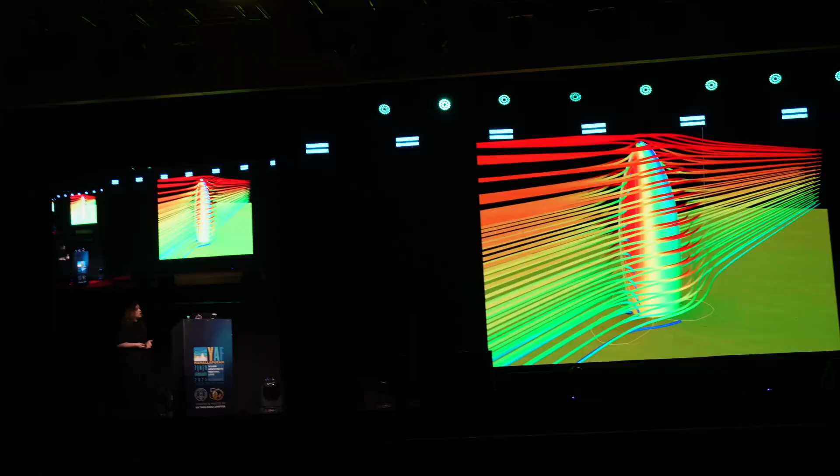I will give you a simple example of 30 St Mary's Axe, London's first ecological tall building and an instantly recognizable addition to the city skyline. The building is rooted in a radical approach, technically, architecturally, and socially. Being quite an old building at this point, many people know that it was developed through an array of different simulations that were revolutionary at the time and helped us shape the form of the building.

But very few people know that it was Excel that made us able to do it. Given the lack of affordable parametric tools at the time, and extremely limited interoperability between different CAD software, what we ended up doing was develop all our equations in Excel and write a small software in Visual Basic to generate the entire building in our modeling software. This meant that any change required by structural engineers or our designers could directly be replicated through numbers into the model.

But because we investigated the possibilities of this technology so many years ago, today we are able to use augmented and virtual reality not just as a visualization tool, but as a design collaboration tool and at a fraction of a price. That allows us to work with each other in many weird and different ways, and this connection with each other is important because human collaboration between creative minds is at the heart of how we operate in the office.

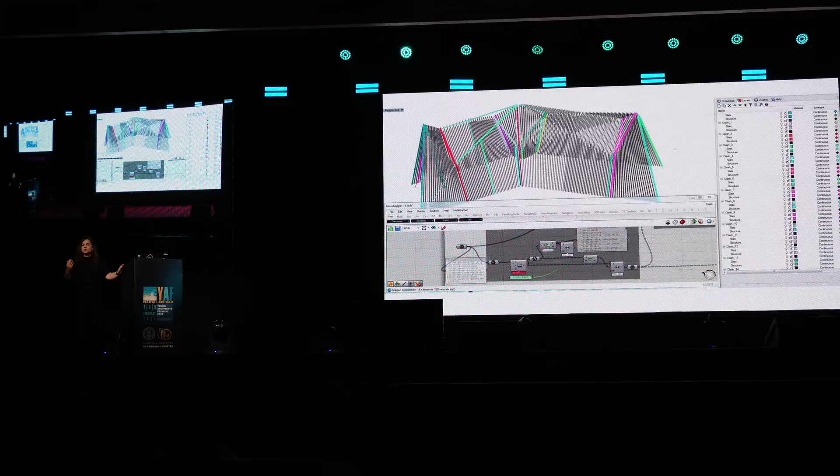So every change is replicated in real time, and details were very carefully considered to facilitate assembly on site. And you can imagine everything is based on that one model that we need to check all the time. So we ended up writing a small piece of software that did direct clash detection as we were designing, so even very small collisions of the millimeter could be directly spotted before anything went really bad.

The result of this precision modeling and documentation provided a rational structure for the beautiful randomness of nature, as the pavilion cladding has become a trellis for the vines planted around it.

My medium project could not be but something here in India, because we do a lot of work in India, and I couldn't have a presentation here without showing you some of the work that we do. That is the D.Y. Patil University Center of Excellence, and it is a really wonderful project. I spoke quite extensively with Chris Bubb, who's the head of this project.

And he always tells me that in this project, technology is not the master, but the servant. It's a combination of a passionate client and a very strong drive for performance-driven design. And it was really technology that ensured us that we analyze every single aspect of the design to make sure that the building worked appropriately.

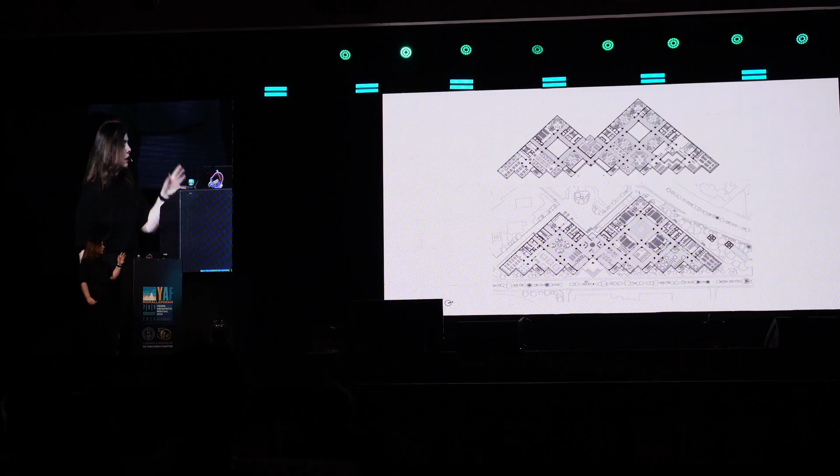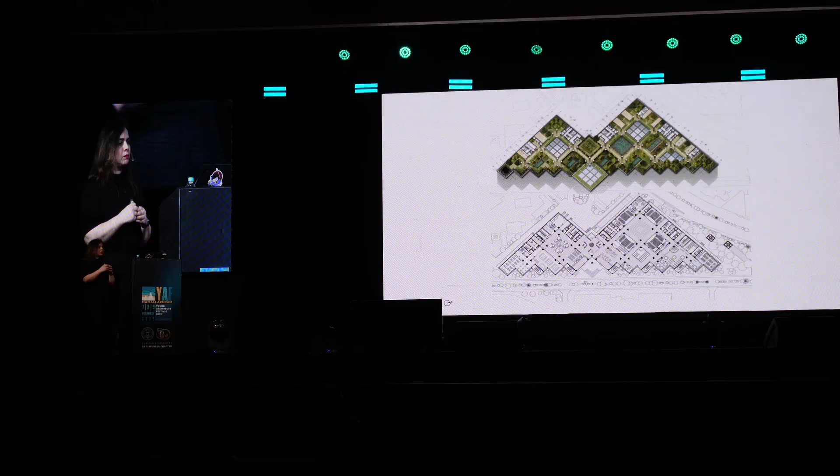On your screen you see a typical floor plan that was fully adaptable, and that plan kept changing all the time, with a very focused point being on the light wells. The light wells were the center of a lot of different activity because they are actually quite adaptable. Different light wells can be used for different uses and can adapt based on different needs, and that was a very big characteristic and is still a big characteristic of this building.

We keep talking about performance-driven design. What does it mean? It means that you're trying to create a building that performs in relation to your experience, trying to make your experience the best it could be.

This is a very good example for the gardens. The gardens were actually analyzed extensively against light, temperature, sound, and air to ensure the more comfortable experience when it comes to light, not too much humidity, allowing for subtle air to come in and create natural ventilation, etc. So a lot of these choices, although they just seem and feel right, they're not random. They're very carefully thought out beforehand.

As I said, sustainability is very important for us, for every building that we do. And in this case, the university has a LEED Platinum accreditation, which is as high as it gets. And that's because, despite this being a concrete building, something very clever was done. When we have concrete, it's cement usually that has the most embodied CO2 and creates most of the sustainability issues.

In this case, what was done was that 60% of the cement was replaced with GGBS, which stands for ground granulated blast furnace slag, a byproduct of making steel. And just by doing so, we have concrete that embodies far less CO2, while at the same time being cheaper and looking whiter.

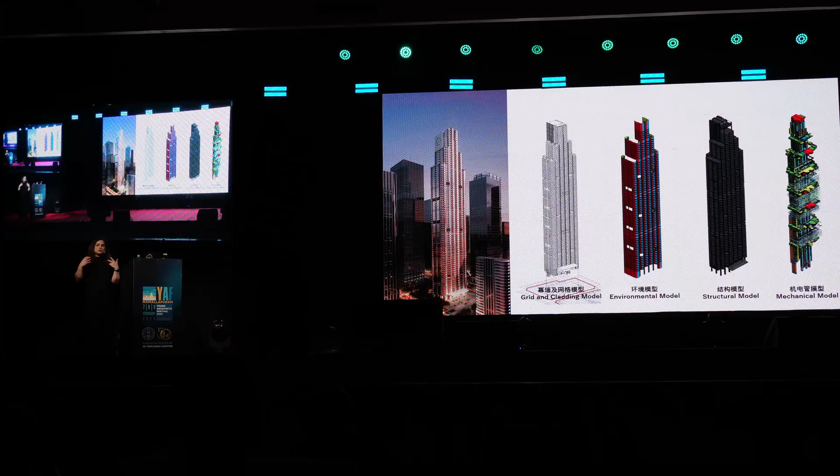So you can imagine if this is a linear process, one single change can take a long time. And this needs to happen in a very small amount of time with a very small team. So we saw it as a project that negotiates as much geometry challenges as coordination and workflow, and that's something we really wanted to focus on - how we can make this workflow more efficient.

To do that, the first thing we did was draw a data flow diagram that could allow us to understand who actually owns what data and how that data flows across the process. From there, we started building parametric workflows to automate different aspects of project delivery, and not just automate, but allow for changes in one model to happen simultaneously in all other models for every other stakeholder. We managed to do this using our proprietary interoperability software called Hermes, which we're going to show you in a bit.

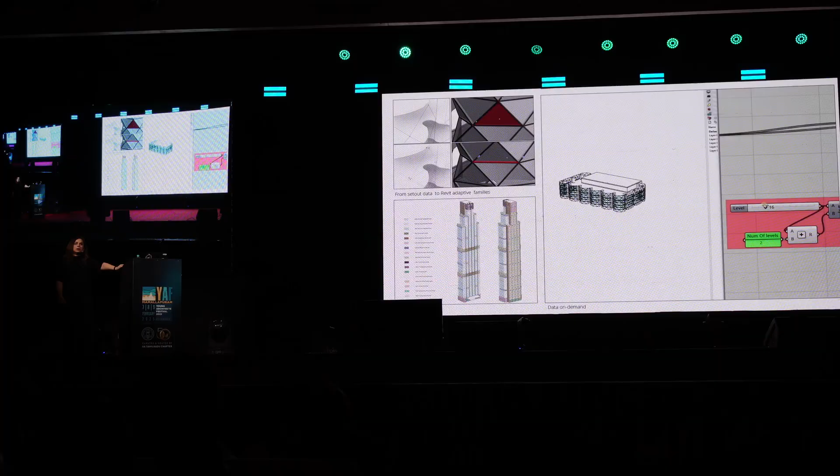Through these different models and workflows, we managed to do an array of different things. We allow, for example, Rhino files to directly deliver Revit adaptive families - so you go from a Rhino parametric model to an actual BIM model that is fully adaptable as well. We allowed for a lot of metadata diagrams to be created, and we allowed different stakeholders to only ever retrieve the type of information that they needed.

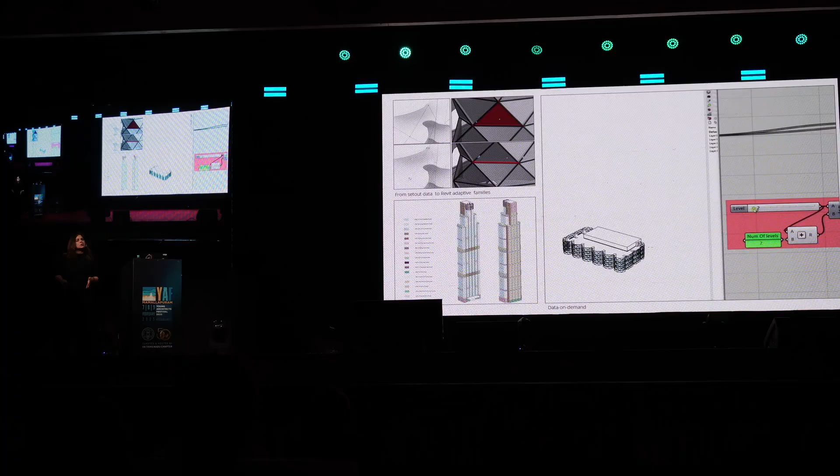In this case, you see on the right-hand side data on demand used by an environmental engineer, where they don't usually want to analyze the entire model. They want to analyze every 2 floors or every 3 floors. So through that, they could just select the levels they wanted, click a button, and get that model directly within their own software.

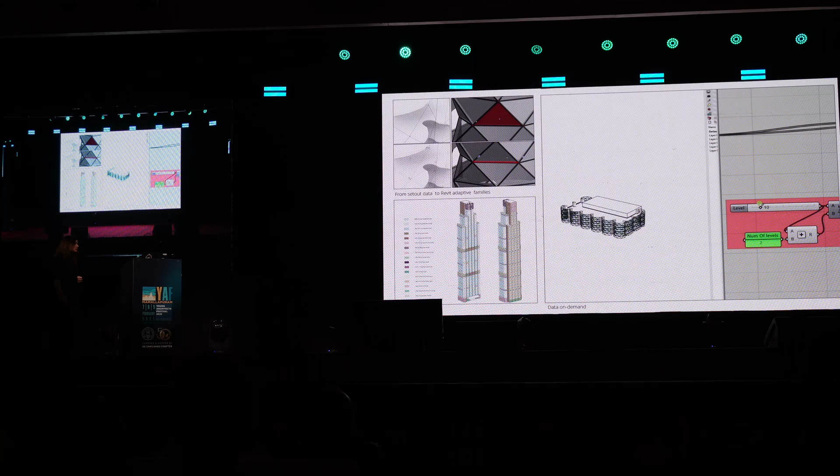In addition, things like that happen with the structural engineering teams as well. This video shows you how the team works. The structural engineers have 4 types of columns and they need to size them differently. Every time they run different analysis or the model slightly changes, that sizing changes, and that sizing is driven through the Excel spreadsheet.

That sizing then affects 16 different cladding variations around the columns. And those cladding variations don't only depend on the typology of the column, but also on the location of the column on site, as well as the relationship it has with the facade, which is also changing based on the location. What we're doing here is the structural engineer is changing the sizing of the columns in Excel.

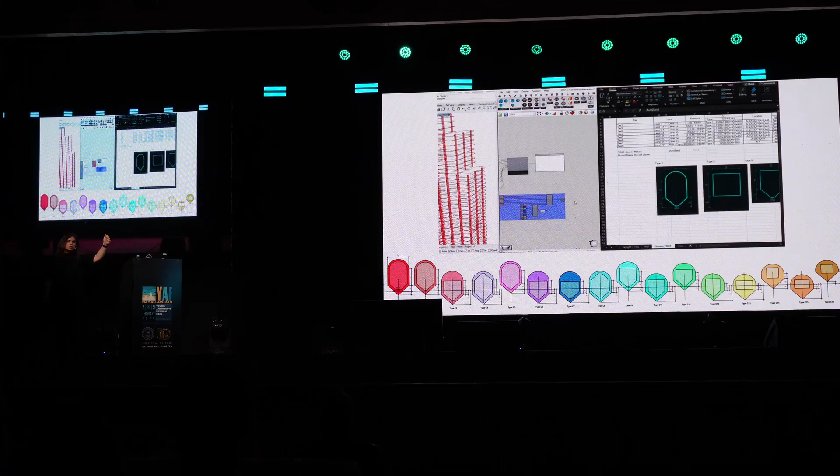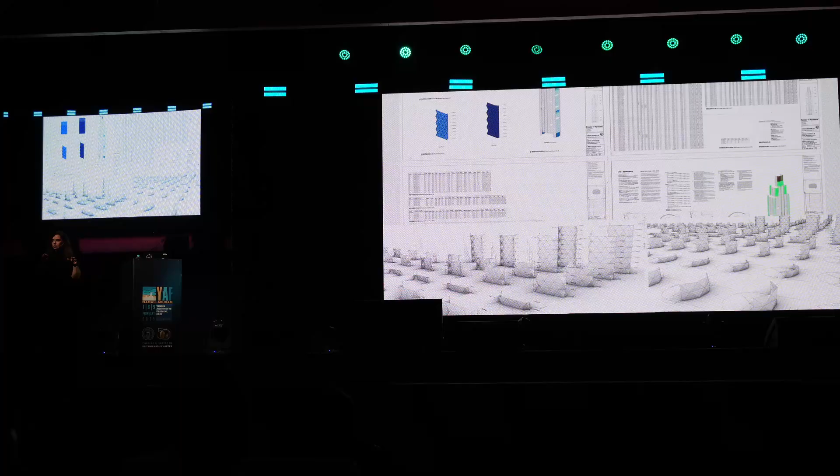That directly creates and is pushed into the parametric model by just clicking the Hermes button. The entire columns, everywhere that these columns exist, update. All the cladding gaskets update, and the entire geometry adjusts to that new column size. This happens literally in real time as you see it on the screen. And that's a direct connection between your structural engineers and your designers - it doesn't have to do with an export and import process.

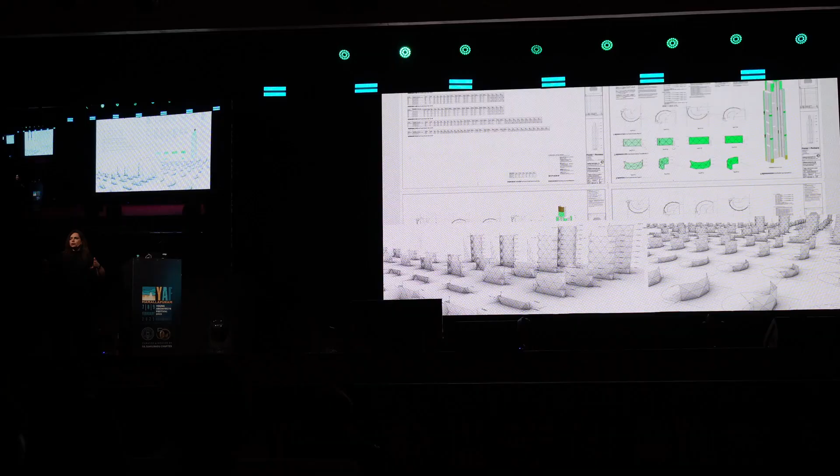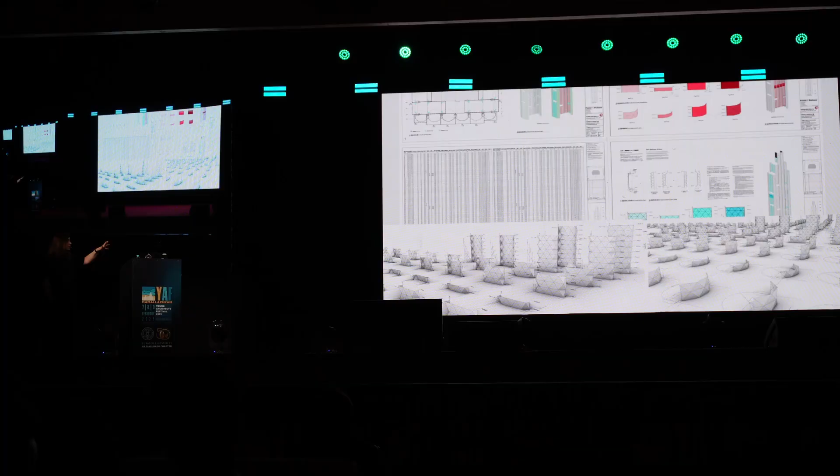Another challenge we had was that we had to create a blueprint for this. It was not enough to just send a model - we had to send a way of thinking, what we call a geometry method statement, that allows anybody with any knowledge whatsoever to take that method statement and recreate the model without necessarily having all the computational knowledge that we may have. We managed to do this by splitting the geometry into different parts that are the same, and the geometry statement you see there was automatically created, not manually created. The only manual part is actually the translation into Chinese.

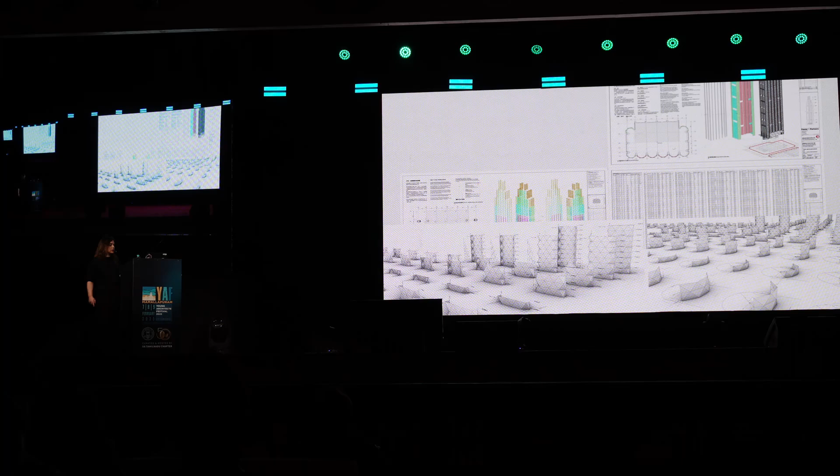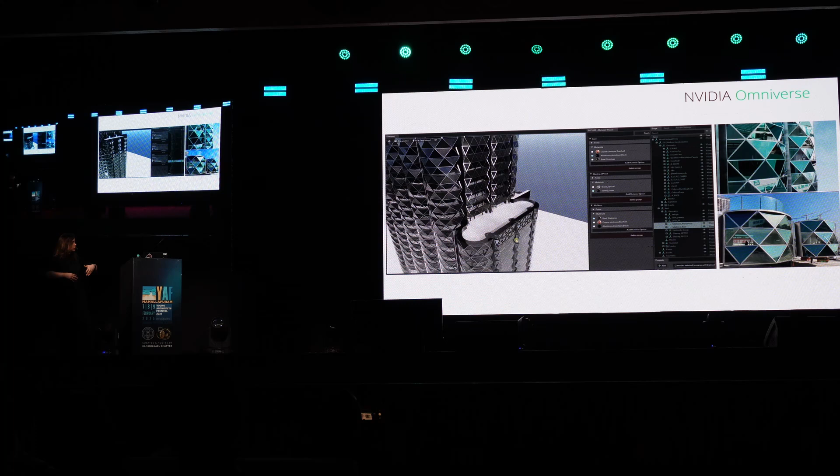Another thing that we played with in this tower was physically accurate materials. For those of you who don't know, physically accurate materials are materials that allow you to closely resemble how light interacts with real-world objects. So we used physical-based rendering for this exercise, through a software called Omniverse from NVIDIA. Omniverse allowed us to push different information from different people onto one single platform, and we wrote a few programs that let us change these materials in real time and change how the tower looked.

And we went for this idea of a digital mock-up. You have to create physical mock-ups that cost not just money but embodied CO2 - you have to travel a lot, there is a lot of money in creating them and traveling to see them. So we were trying to avoid doing too many tests with physical mock-ups. We said we're going to do it digitally, and the result was the top right-hand corner image.

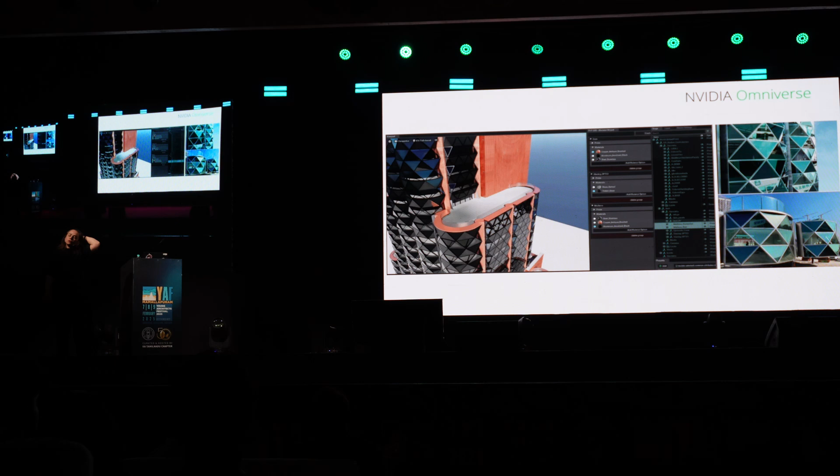When we showed that to the design team, they said there's no way the glass is going to look that black and the entire thing is going to look black. Lo and behold, the bottom part is an actual physical model. Do they look the same? I think they do look considerably the same. So through that software, we can do digital mock-ups very, very quickly.

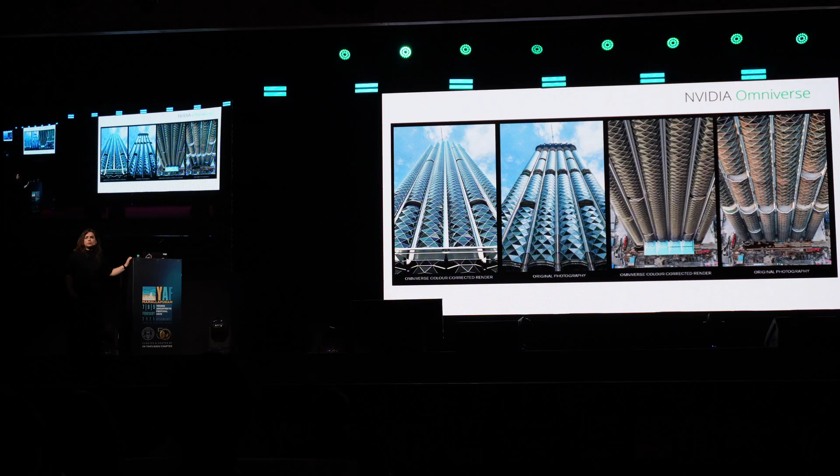Here you see on the left-hand side of each one of these pairs of pictures our color-corrected render delivered through the software, and on the right-hand side you see the original photography of the tower. I would say that they look pretty similar. Imagine how much more sustainable you can be if you don't need to create 20 mock-ups, but just the final two.

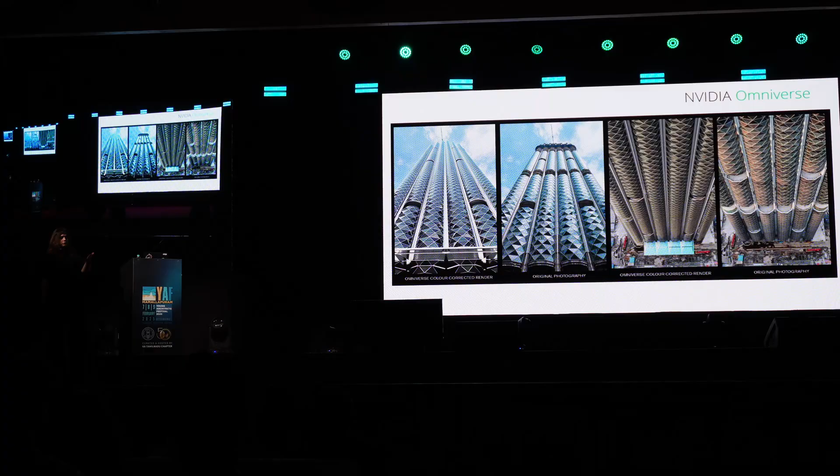And so there it is in all its glory in a rendering, but soon with you as it has topped out in April 2024.

Measuring 5.5 kilometers with 1 kilometer width, the governmental complex occupies the heart of the city, and that's where our main design work in terms of master planning is focused. It's defined by a strong urban grid that structures the city around it. A green spine runs throughout, and actually 60% of the area of that grid is not buildings, but is occupied by greenery and water.

The High Court complex is located on the central axis, and it has a stepped roof that was inspired by India's ancient stupas, and it has been influenced by traditional temple arrangements. Today I had the good luck to be taken to some of the ancient temples here, and they were wonderful. Raja, who so brilliantly toured me around, was explaining how you have this concentric circulation and rooms that follow the temple - and that's exactly what we have here. We have concentric rooms and circulations around the entire building.

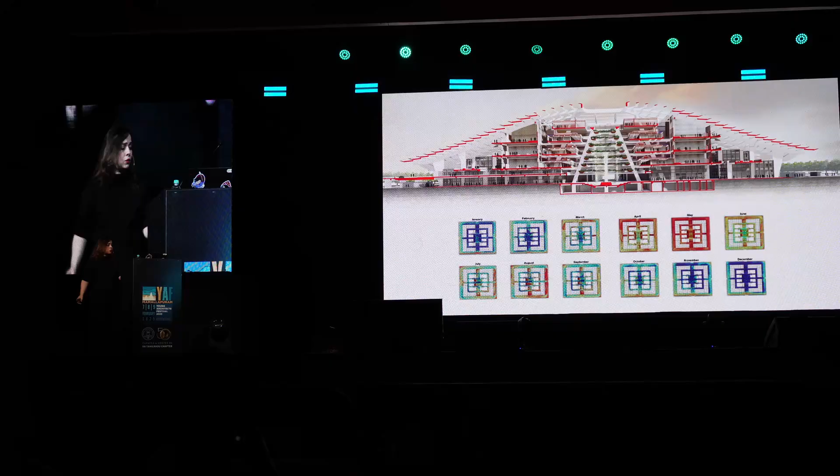We also have a courtyard and a roof garden that allows the greenery to penetrate into the interior spaces. The deep overhangs of the roof provide shade while also providing natural ventilation. That was very important because we wanted a canopy that would be fully comfortable almost throughout the year. We achieved that by trying to be very sustainable.

The entire city has been designed to the highest standards of sustainability with the latest technologies currently being developed in India, like photovoltaics. In this case, the roof opens up and allows air to come in, so it can be fully comfortable and airy and not too hot and humid. The PVs on top gather so much energy that they allow the building to run all year long just from the PVs alone.

We analyzed this exterior space and found that it has enough comfort in terms of temperature and natural ventilation for somebody to be there and stay for 11 months a year. The only month that is actually too hot, and even these measures cannot help you if you don't have technical ventilation, which we don't have in these spaces, is the month of March - or I think May or March, one of the two. But for that month, the courts are also closed, so it's going to be okay.

At the center of this green spine lies the Legislative Assembly building, which I think is quite a democratic and cultural symbol for the people of Andhra Pradesh, or has the potential of being. The assembly sits within a large freshwater lake and is framed by the Secretariat and other cultural buildings. Inside it has two major debating chambers and a lot of admin facilities.

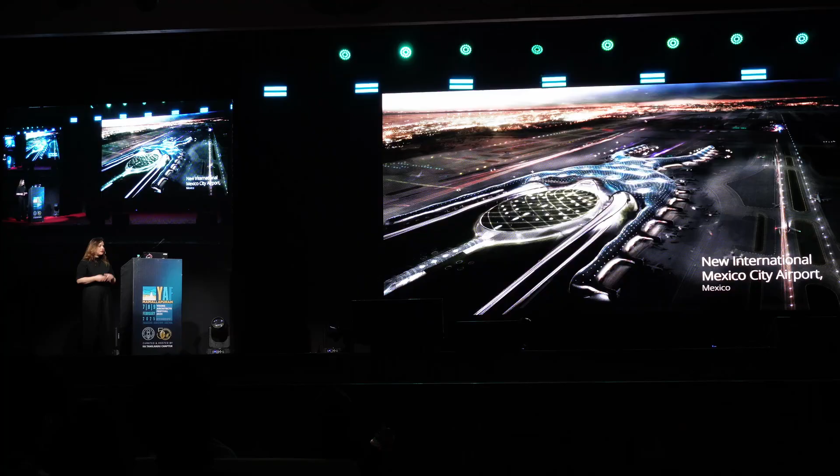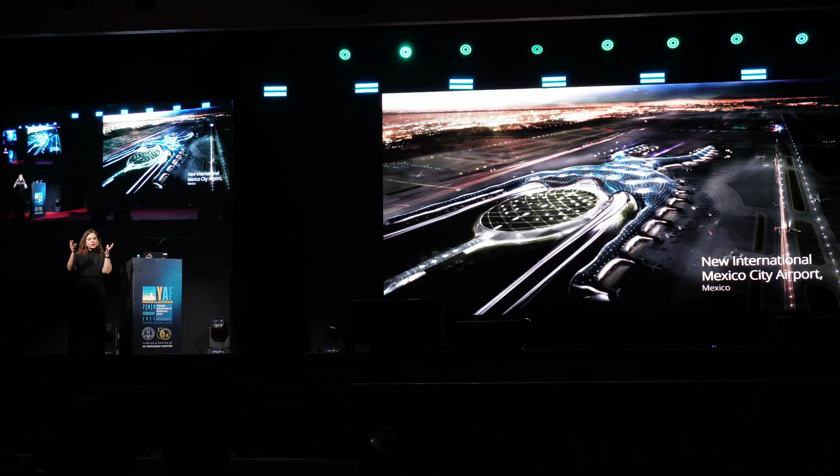Let's begin with structural considerations. The entire city of Mexico used to be on top of a lake, so the ground settlement conditions are really horrific. It's a highly seismic zone, and you've seen the earthquake that happened a few years back that was devastating. And to top everything, we had a volcano nearby that every time it exploded, it released volcanic ash that when wet, became concrete. So quite a few interesting challenges to deal with.

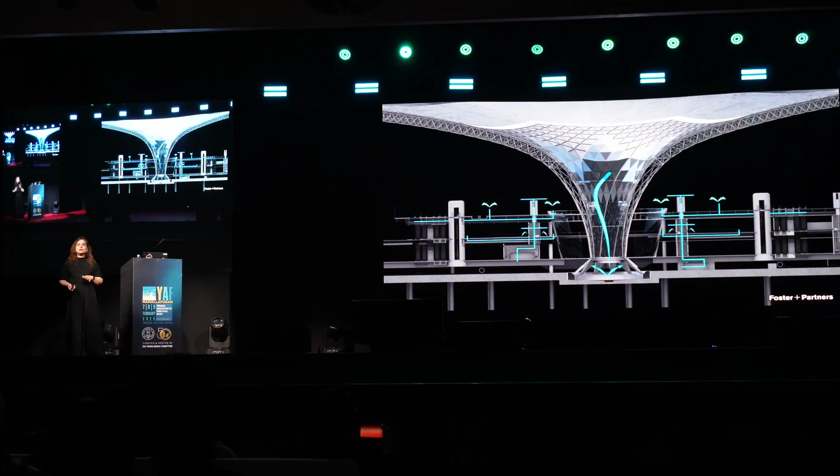Now, in terms of sustainability, we have a roof that works really hard. It has to integrate not only structural efficiency, but also thermal performance, ventilation, glare, daylight, and views. But most importantly, we're trying to rethink the paradigm of what an airport is. We want something that works as one single skin, lightweight and continuous as an envelope, and something that also did not distinguish between wall, ceiling, and column.

Now imagine that this roof is only as big as the 21 funnels that we have. In terms of scale, we're 90 times bigger. In terms of topological complexity, we're thousands of times more complex. So, how do you solve a problem like that?

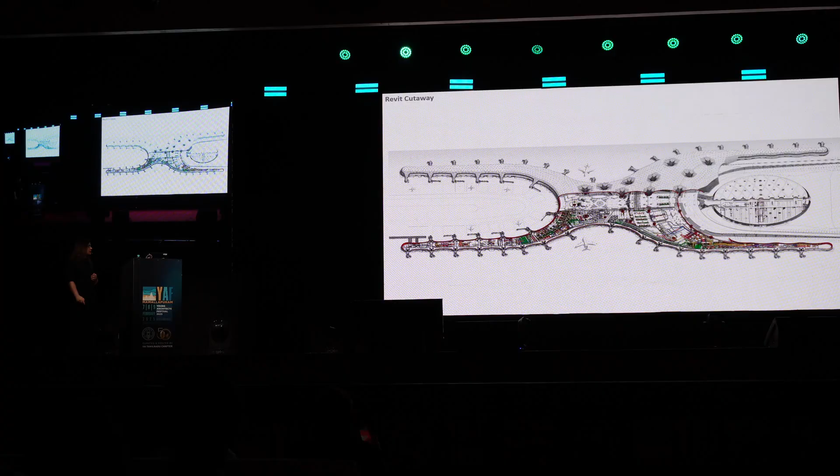And all this is just scratching the tip of the iceberg, because from this we have to create the tetrahedron mesh, all the models. I can't even start to explain the level of detail that we had to put in this model, which created a BIM model so complicated that it was showcased in the Royal Academy in London as a piece of art.

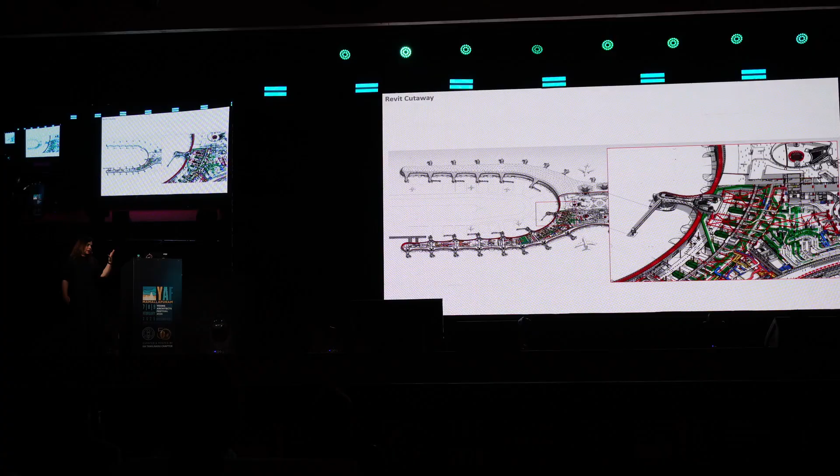Yes, the dream may not have come true, but what was and still remains true is that with this project, like with every other project, we are trying to create a fantastic experience. Because as architects, all of us, I don't think we're creating buildings, but we're crafting experiences. We wanted to create an airport that was welcoming, bright, lightweight, singular.

But I promised you technology, and I showed some technology, but not too much technology, so here it goes. And if you feel the urge to leave, I would not be offended.

We discuss about technologies in architecture, and everybody discusses now about BIM as if it's the height of sophistication. And I would say BIM is in the past. What is in the future are technologies that can reshape our industry, and these technologies very rarely come from within the architectural industry. They usually come from the games industry, the movies industry, or even computer science industry to revolutionize the way we work. And I will start with GPU computing.

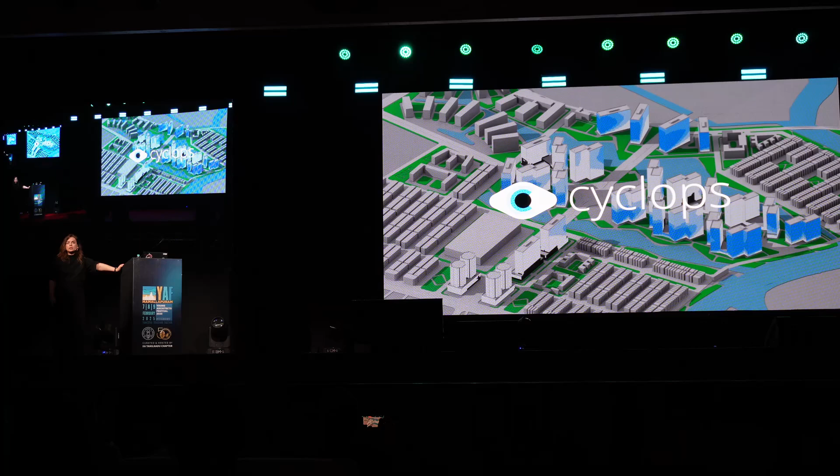How was Cyclops created? Many years ago, in 2007, we needed to create something that allowed us to visualize what we can see from every single seat of a stadium. So we were running views from every seat in a stadium, making sure that every single seat was great. At that point, we could run around 24 views per minute.

But today, by just using the computational power available to us through GPU computing, we can run more than 600,000 views per minute, simply by taking advantage of the GPU powers in our laptops.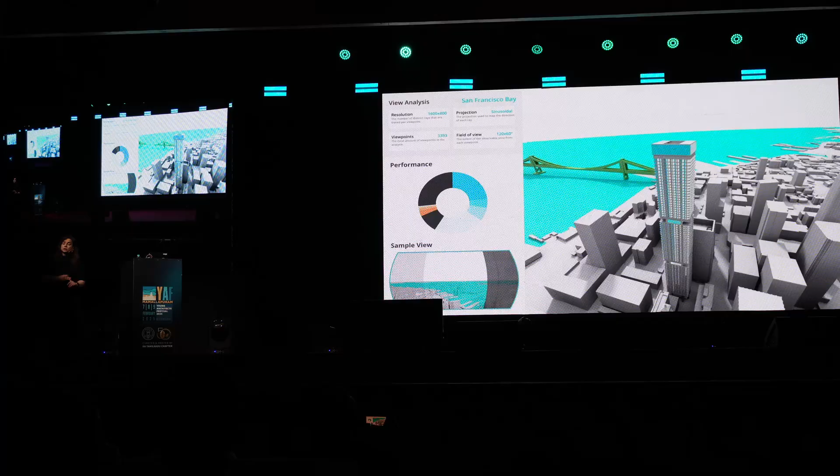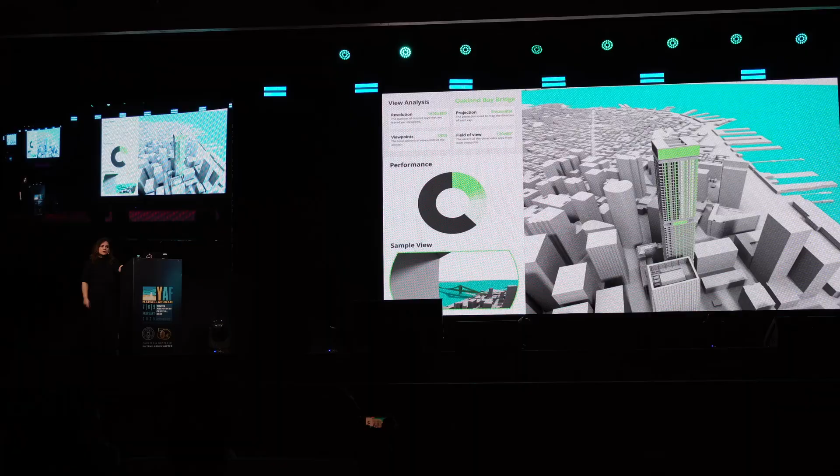This means that we can now run anything that is related to ray tracing, so daylight, sunlight hours, views, artificial light, not in a matter of days or hours or minutes, but in real time. And do that on not just a building scale, but a city scale. Therefore our designers can now very well understand how their options perform as they create them.

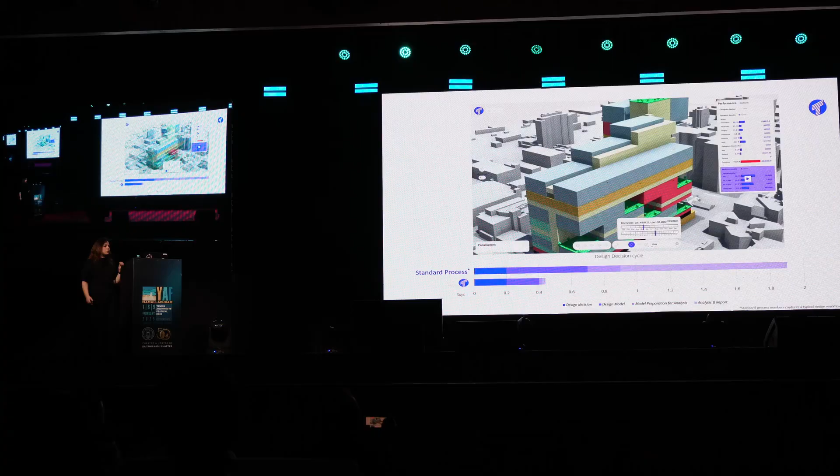As I explained before, GPU computing is helpful in different ways. In using gaming engine software, we have developed tools like Thalia. Thalia works a little bit like this Minecraft on steroids idea, where you as a designer can start designing something, and as you design, you can get back feedback in real time against all the errors that you're creating.

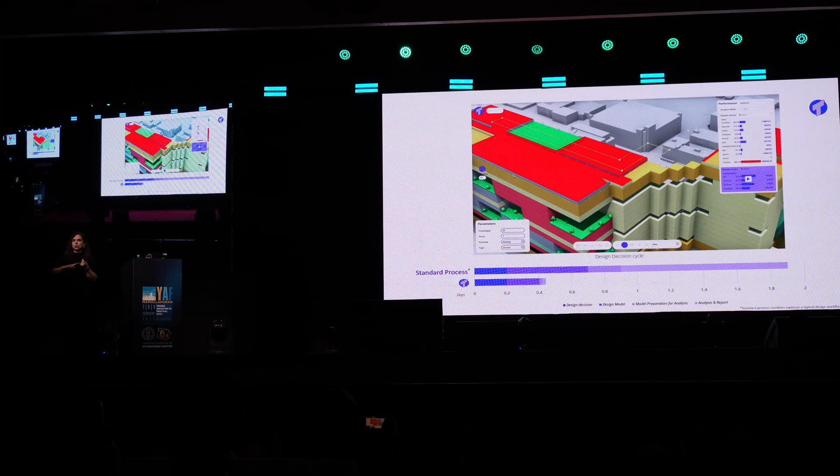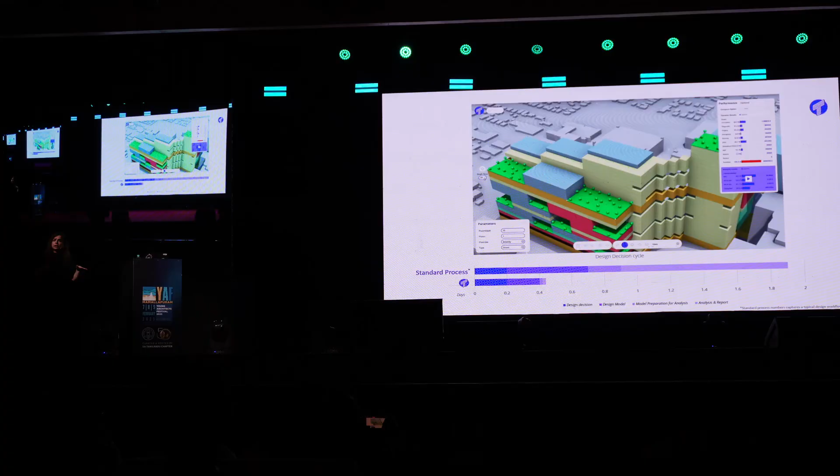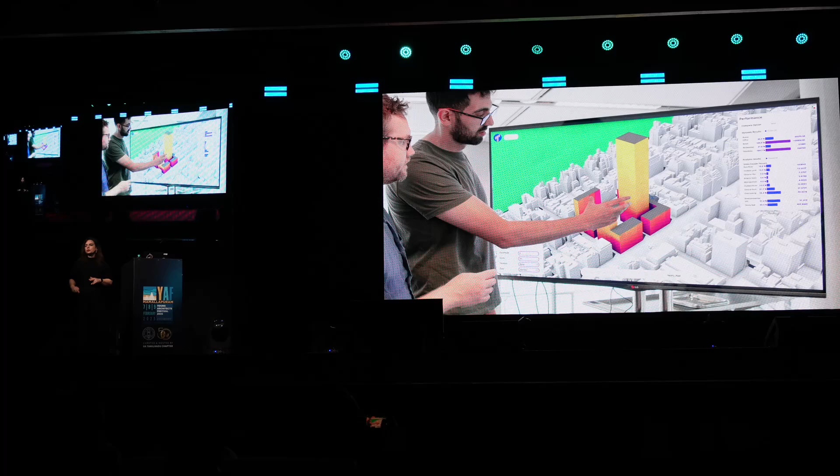How well your daylight works. What is the simulation in terms of whoever works in your floor plates every given time? What is the financial ROI? These key performance indicators can be directly connected with your design changes. We find that platforms like this empower designers to calculate and compare these key metrics for their options in real time, therefore allowing them intuitive yet informed decision making very early on in the design process.

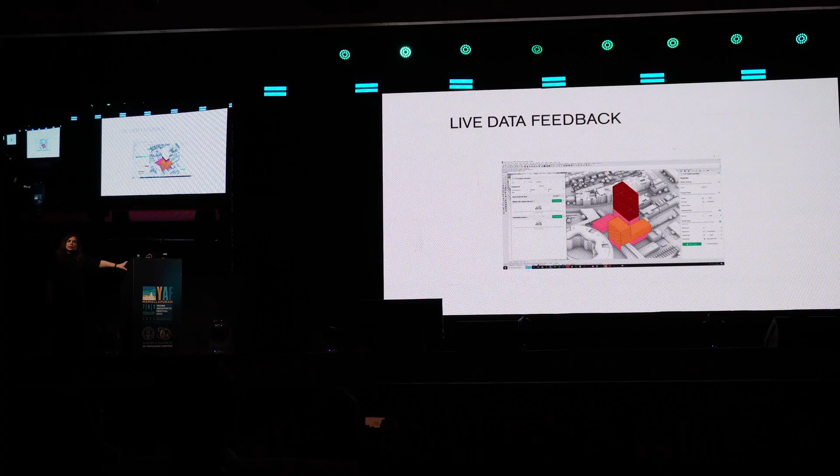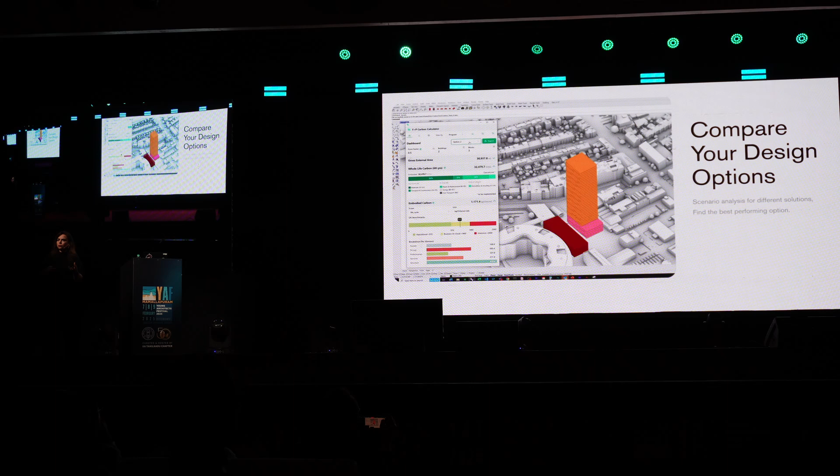And with that in mind, that's how we created our new carbon calculator. This is a tool that lets us, even from sketch design, very quickly say whether a solution is better than another solution when it comes to embodied carbon. We work with that not just in terms of materials, but different uses and also different typologies of structure, because we know that Foster & Partners may create things that are more complex or difficult, and we need to take that into consideration when we're doing CO2 calculations, because we don't want to undermine how important this is.

Another capability that first thrived in the visualization and film industry before being introduced to ours is distributed computing—cloud computing, or computing through different cards within your office. This moved from faster image rendering, which was initially what it was created for. I used to go to conferences like 15 years ago where everybody was saying, how can I run a really good high-end analysis, not in 3 days, but in 3 hours. That's how this was developed.

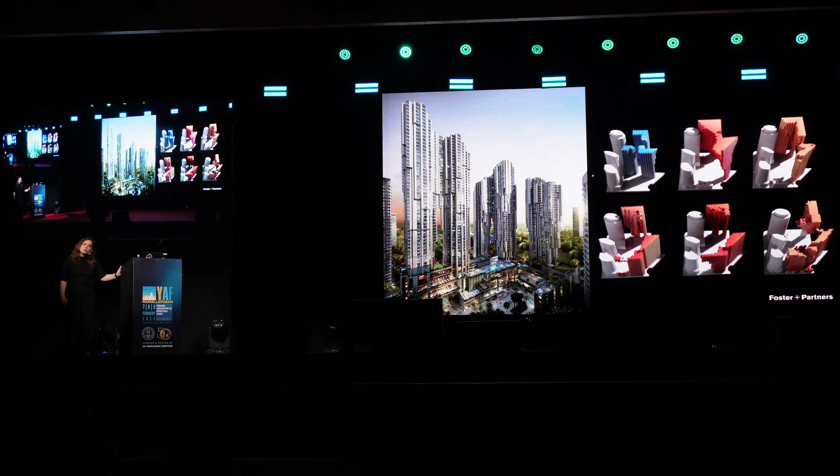If we take that from image creation to actual analysis, we can turbocharge our optimization capabilities. By optimization capabilities, I mean using genetic algorithms in the design process, where you specify the design DNA describing what you want—basic characteristics and parameters—and you specify the objectives: do I want good daylight, do I want views, do I want the area to be a particular type? Then you let the computer work it out, creating many different options, like in this tower, exploring what the massing would be for optimal views to the Petronas Towers in Kuala Lumpur, while keeping structural stability and daylight.

But what happens when you try to apply these premises on a city scale? I'll show you Guangdong, China, a good example. That was a winning competition where we used our in-house distributed computing system called Hydra, which allows exactly for that.

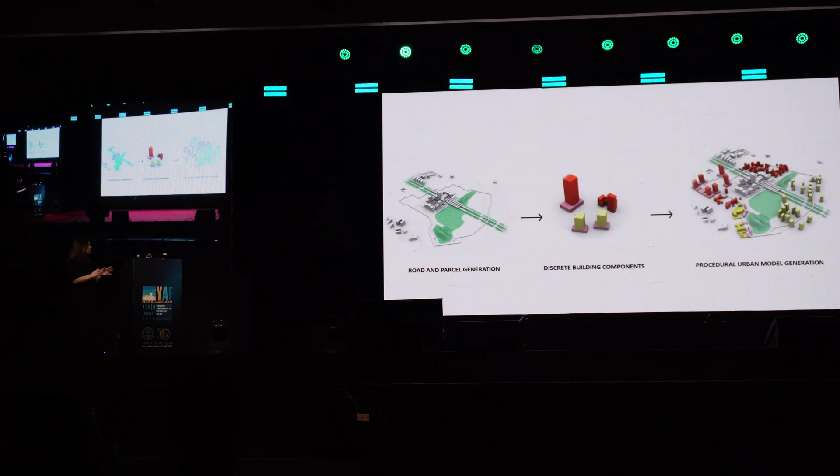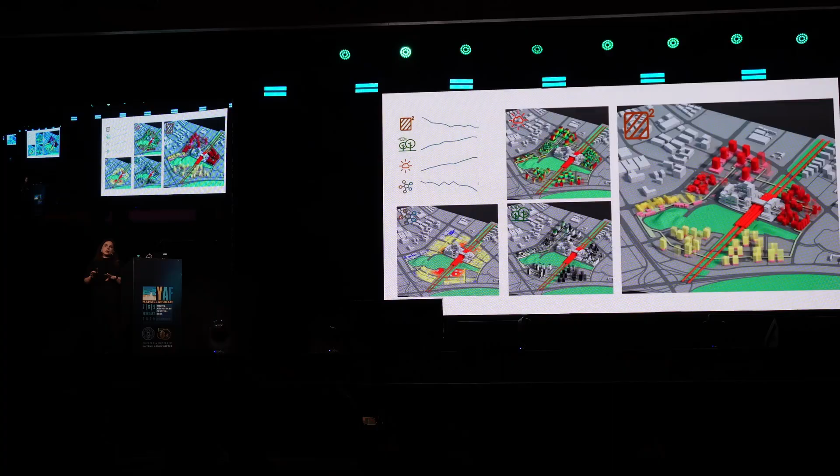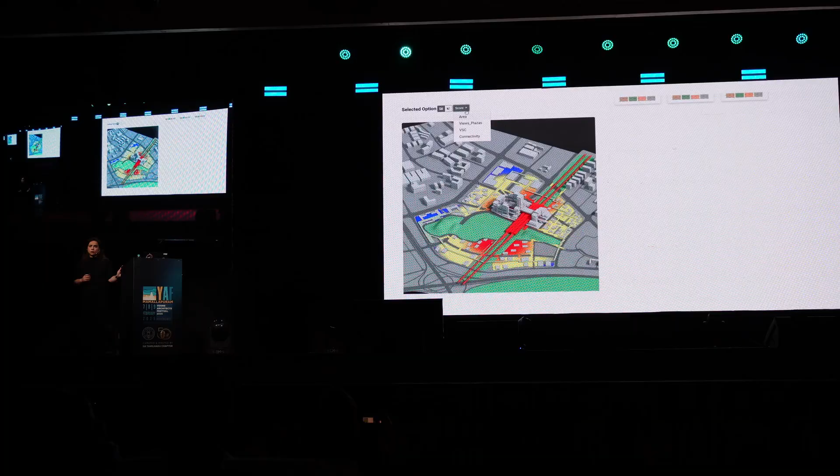With this project, we wanted to develop from scratch an urban layout that maximized connectivity between neighborhoods, views towards the central park, daylight potential, and total floor area. We could have spent months creating and analyzing thousands of options to find the best performing ones. Instead, we fed the requirements and design rules to the computer and let it do the heavy lifting. The genetic algorithm generated and evaluated a few hundred thousand options, and at the end gave us the 100 best options to start working from.

We could also have an interface explaining why one option was better than another against the criteria we set. That's not something that took 3 months or 3 weeks—we did those hundreds of thousands of options overnight.

To compare options, we also create different web applications, because again, this is not the design—we're not using these things to produce a design. We're using this to help the designers find the best solutions. So we give this to the team, and say, after all this exploration, these are 100 options that comply with your objectives. Go to the web application, see every option, explore it, understand what makes it better for daylight, where the massing sits for a better solution. And because we can, we create a PDF report, shown on the right, with one click of a button, to explain to the client why this is better, and then start working from that option to create these magnificent designs—this is a Foster & Partners design.

Moving on, technology not only helps us design better, but also better connect with each other, whether in terms of software or experiences. In terms of software, interoperability is key. I've already spoken about Hermes and how it helped us—just to recap, Hermes is a cloud system that facilitates the exchange of design data in real time across different people working in different software in different locations across the world. This not only better connects design amongst all stakeholders, but also permits substantial changes to happen late in the process.

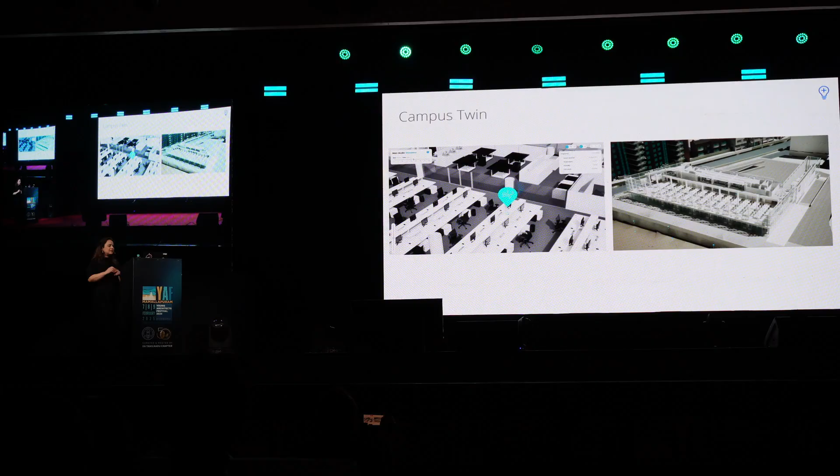To that end, we have developed our own Internet of Things toolkit, and on top of that, we built a smart campus application which connects our ongoing campus twin development. Through that, we can not only monitor and regulate how well the buildings perform within our campus, but most importantly, identify metrics that can positively affect the experience of its occupants, and potentially train the building systems themselves to perform in relation to how its users want them to perform.

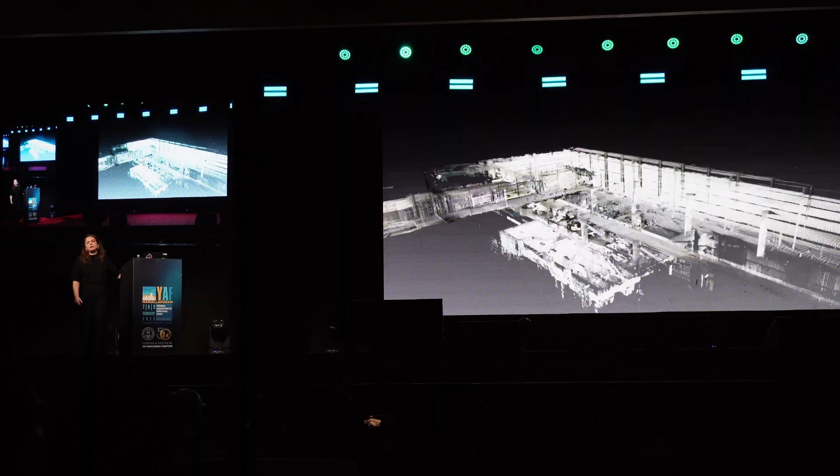And in order to do our digital twin, the first thing we have to do is create a three-dimensional model, and that is a point cloud that we have created for our office. We realized that creating these point clouds is not an easy thing. Furthermore, what happens if you want to create many of them? And what happens if you want to fit them in the digital twin to see how well your construction works? And that's how Spot came along.

We were the only architectural firm to be part of the initial program for Spot, where we had the robot with us. We were supposed to have it for 3 months, we ended up having it for a year and a half. What we were trying to do was bridge the gap between as-design and as-built. Spot will automatically walk through our building here in Battersea Park, and it will take point clouds that, through the help of a software we were collaborating with at the time, would create BIM models, and those BIM models will showcase the deltas between the as-design and as-built.

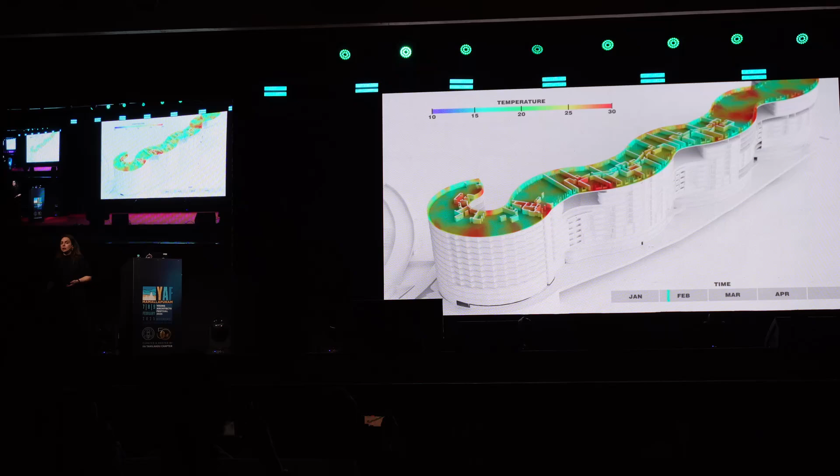And we started thinking, can Spot actually become part of an operational twin? Instead of putting sensors everywhere in a room, you have sensors on the dog who walks around the building and directly picks up things like temperature, how many people are in a room, how long is the queue for somebody who's getting coffee. Can that fit back into the digital twin and allow us to very quickly change parameters and change the way the building operates? These are some very interesting ideas that I think are going to become more and more common in the years to come.

And I will kind of wrap this all up with AI and machine learning, because when we're talking about technologies that came from outside the AEC but will have a profound effect on our industry, we cannot but talk about AI, which I think has the potential of bringing an unprecedented change to our profession.

But as many of you know, change can have unpredictable consequences. Think of the iPhone, a technology nobody even knew they needed, but nowadays not only does every one of you have a mobile phone, but that phone has also completely reshaped the way we socialize with each other, because it brought up the rise of social media.

So what could the consequences of disruptive technologies like AI be? What would the consequences of AGI be? A term you might have heard, artificial general intelligence, a computer system capable of not just mimicking us, but generating new scientific knowledge and performing any task a human could.

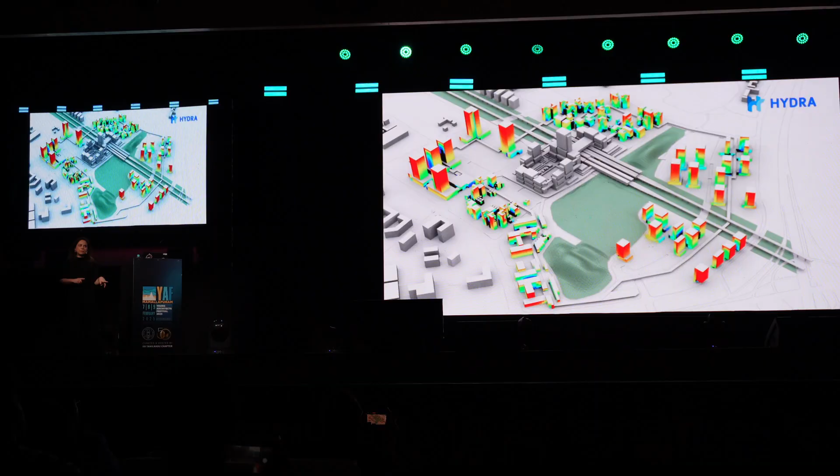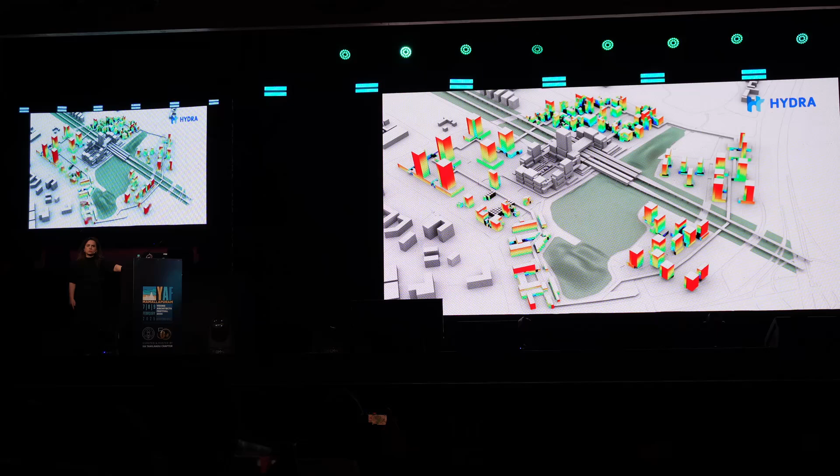So, could we use these rich data sets to train the computer to predict optimal configurations, not in a matter of hours, but in a matter of seconds? And the answer is yes, we can. We can create generative design like that, and a lot of people and a lot of software are actually focusing on doing exactly that right now.

But beyond generative design, there are many key areas where AI is expected to impact the field of architecture, and I will discuss a few of them, and show you what my team has done within Foster's since 2018, where we started working with these systems.

The first thing we did in 2018 was create a design assist model that can be a real-time assistant and provide guidance for difficult problems in real time. We developed such a model in 2018 when we collaborated with Autodesk, where we used artificial intelligence to predict how a passively actuated material would react under temperature change.

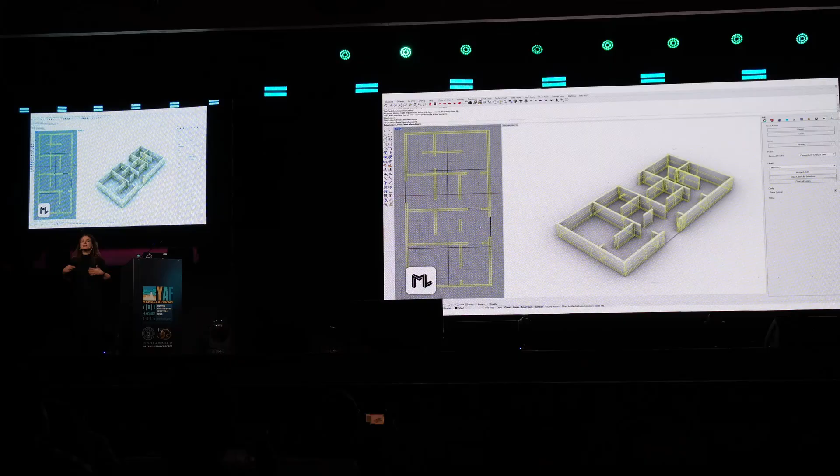We then looked into surrogate models. Surrogate models are machine learning models trained on a huge data set to replace slow analytical processes. We have developed such models for analysis like visual and spatial connectivity since the early 2020s. In these cases, visual and spatial connectivity tell us, in a space, how far you can see and how connected you are with every place, which is very important both for big floor plates as well as urban design.

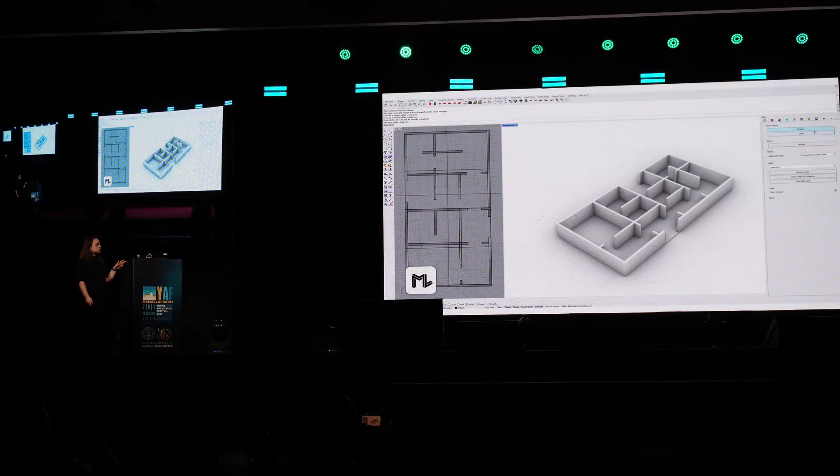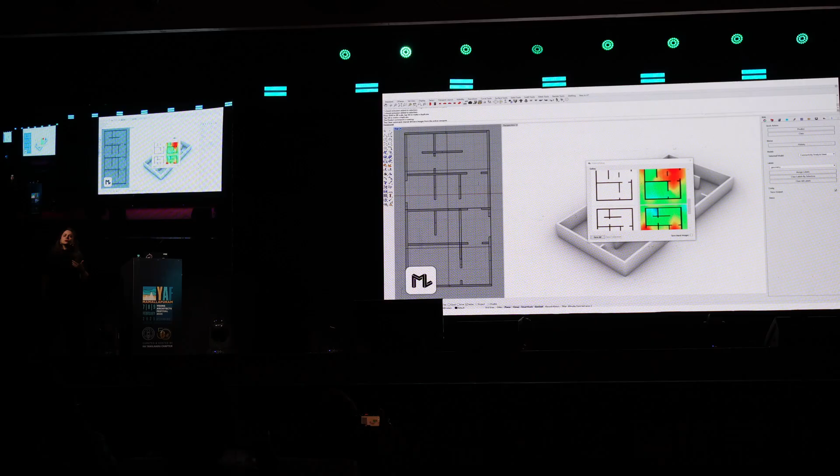With these models, we now have orders of magnitude faster prediction of what the analysis could be. You can see a tool that can be deployed office-wide, where you create a floor plate, click a button, and our ML inference API on the backend directly predicts what the analysis would be, which is 90 to 95% close to the actual analytical engine.

Knowledge dissemination is another huge aspect of AI, particularly through the rise of large language models and these multimodal foundational models we discussed. Through those, we have developed and deployed office-wide tools like Ask Foster & Partners, an application that allows people to search our design guides, created over the past 50 years, using simple queries and getting back instant answers. So you can ask something like, what is the best cladding that I can use for residential in India, and it will probably tell you.

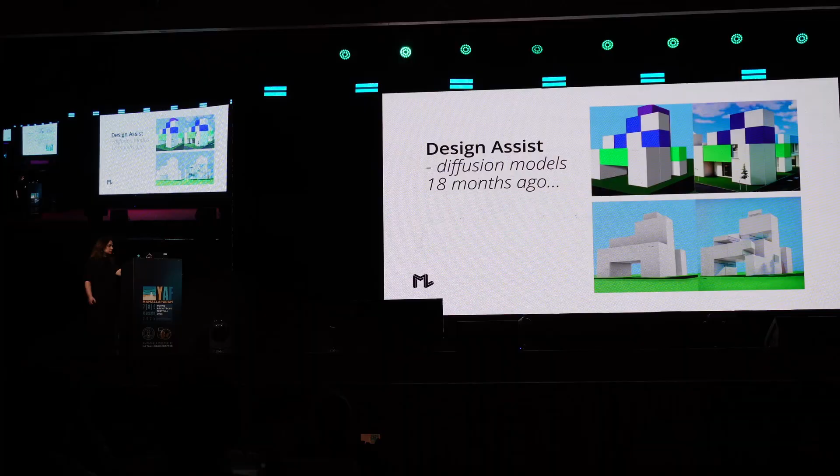Through using these tools, we realized that we really want to use these models in order to augment rather than replace our designers' creativity. And to do that, it's not just about image making. So in using diffusion models, we are now looking into...

...taking the 3D model directly from our CAD software and creating suggestions of what this could be. You see here something that was done more than 18 months ago around diffusion models, where on the left-hand side is one view in Rhino showing the model, and on the right-hand side is a real-time view, again in Rhino, showing some suggestions. But because these models developed so rapidly, six months after that, we were able to get results like this: our machine learning inference API directly within Rhino, where any designer can design anything, write a prompt, click a button, and get a suggestion of how the design would look.

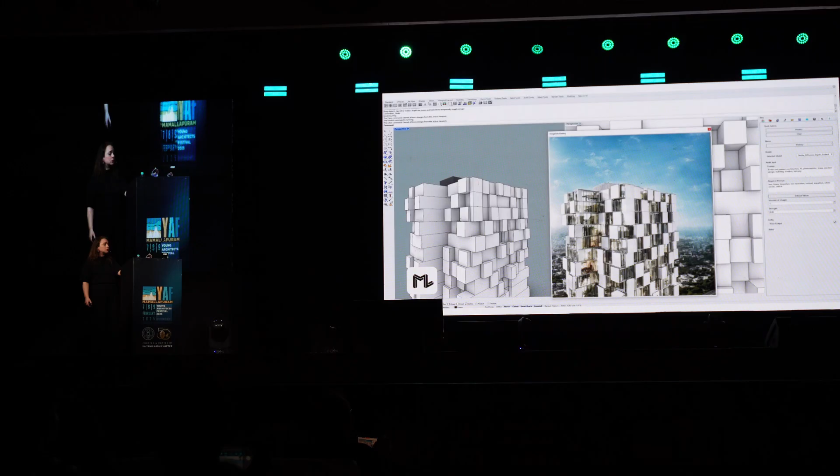And we extended that to our AI portal, which is deployed office-wide, and it allows people directly through Rhino to create renderings, using different models, Flux, SDXL, Firefly on the backend, and then share results for cross-pollination across the entire team. It works through SSO, so it's very secure and only works with people in the office. It allows for branching of images, and everything is hosted on our servers, so IP is not jeopardized.

It also allows for automatic prompting. Most people who use AI find it very hard to write the prompt that will actually create what they want to see. In this case, we can drag and drop an image into the prompt and say, write me a prompt that will show me something similar to that. So the portal will write the prompt and create the image for you directly.

And we're using this for operational data insights as well, which I cannot go into too much detail about, but it's really good for financial decisions. And yes, there are a lot of things around design and construction that I haven't spoken about, and operation even more, that can be revolutionized through the use of AI, and actually already are being.